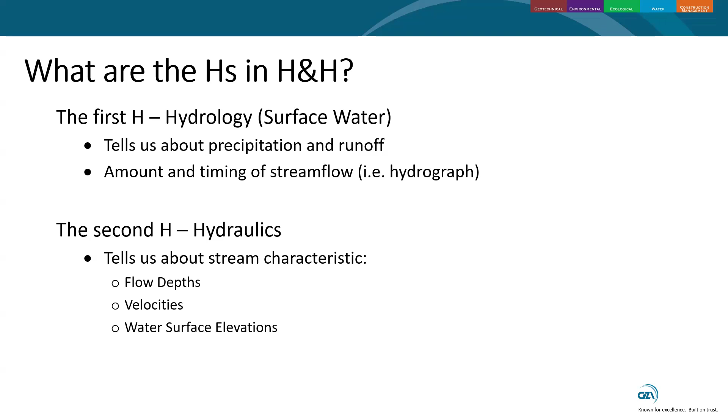Okay, basics. Let's talk about watersheds. So a watershed is basically the area of land that drains all its water into a common point, may that be a point in the river or a point in the lake. Watersheds are also called drainage basins or catchment areas. That's a phrase you're going to hear a lot used interchangeably.

These watersheds are basically defined by topography. So that's the high points, hills, ridges of the land itself. The old school way of finding a watershed is essentially by getting a contour map from USGS and hand marking all the high points around this one point. But nowadays, you can generally use computer software for that, which is very useful.

So an example of a watershed on the bottom right is the Charles River watershed there. And you can see, I guess you can't see the contours, but it has a distinct shape, and all that area in this yellow on the bottom right drains to the Charles River in Boston.

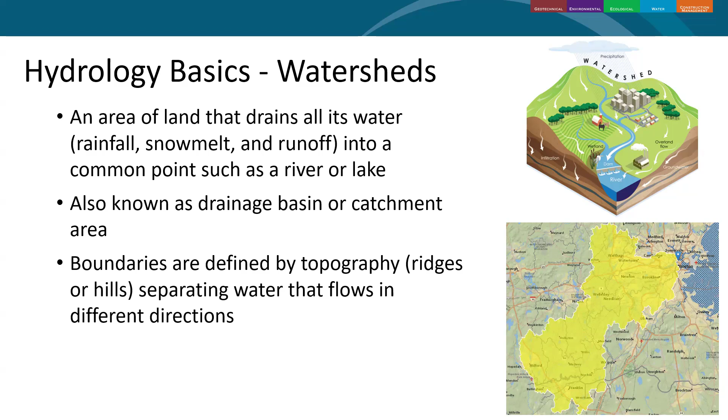All right, so precipitation or rainfall. Generally, precipitation is defined by two characteristics, which is the depth and the distribution. The depth, which is just the amount of rainfall falling, generally can be found from NOAA Atlas 14 for a design storm. That's our general go-to. Essentially, you go to this website, you click whatever point you want to look at depth there, and it provides a point precipitation frequency table, which is shown on the bottom right there.

And from that, you can get your 100-year, 200-year, 24-hour, whatever design flood depth you're looking for. So what's circled there is the 100-year, 24-hour storm. It's a very typically used kind of design flood. For this one point in Western Mass, it's 6.62 inches. So that's the depth.

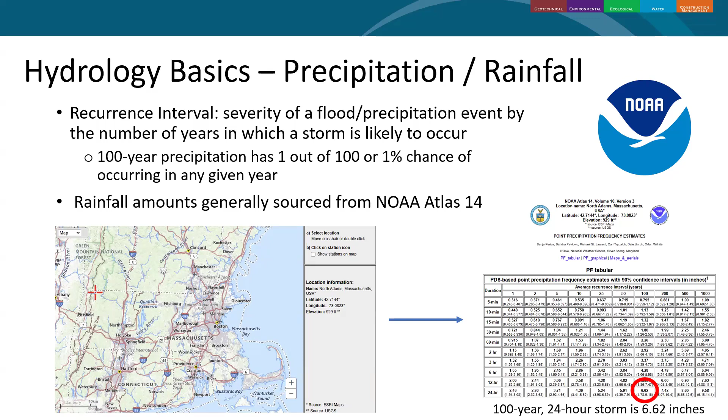The distribution of the flood or of the storm is also pretty important. In Massachusetts, for design floods, we tend to use SCS Type 3, which is a nested storm distribution, but there are other ones available out there, but we'll not get too much into that.

So runoff: essentially once precipitation hits the ground, it can either infiltrate or run along the ground. Runoff is the portion of precipitation that goes over land instead of infiltrating. Runoff is impacted by many things. In the watershed, it's impacted by soil characteristics as well as land use, but it can also be impacted by the precipitation characteristics itself, how intense it is, what the duration is, and the interplay between the soils and the intensity of the rain. But in general, we tend to use soil characteristics and land use to characterize how much runoff versus infiltration there is.

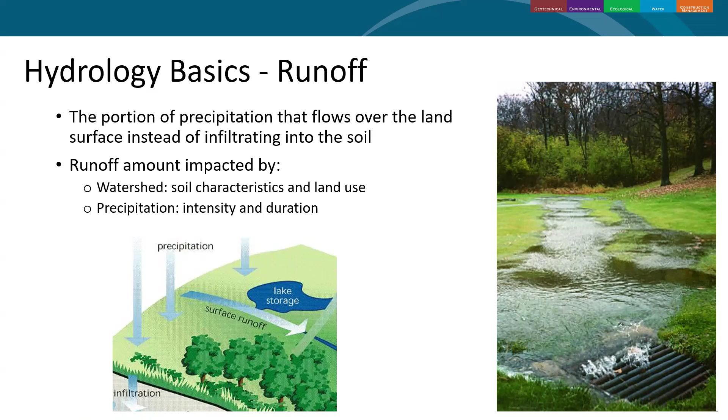So you get a giant flow record, this one's from 1931 to 2025, long flow records. You get the peaks from that, and you can perform a statistical analysis on top of that and find what's the 1% chance of a storm occurring. That's the 100-year flood. And we'll talk a little more about it here.

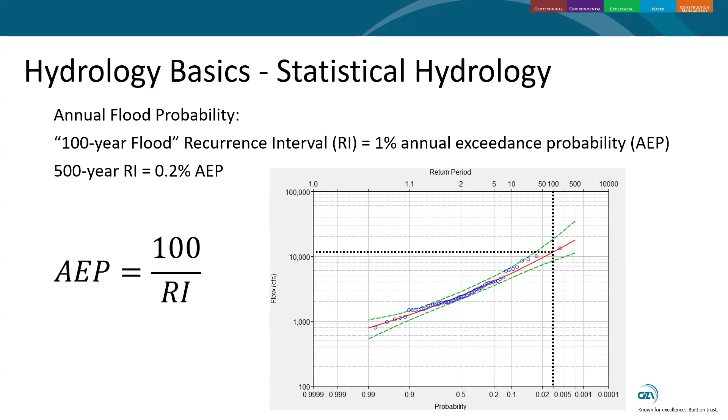So another thing you hear a lot about in hydrology is regression or regression equations to calculate flow. Essentially, it's another statistical method used to define the relationship between different hydrological variables. In general, for our analysis, we want to know what the peak flow rates are going to be based on watershed size and other variables.

So essentially, USGS, again, they record a lot of data at gauges all around a certain area, let's say Massachusetts, and they look at the 100-year flood at every flow gauge. And then they basically try to perform a regression analysis to see at what size and what, let's say, soil percent sand in the watershed produces this size of flood.

It's very complicated statistics, but all you need to know is generally you want to get a peak flow rate based on a watershed size and some other variable. And we'll talk a little more about how to find this data later on.

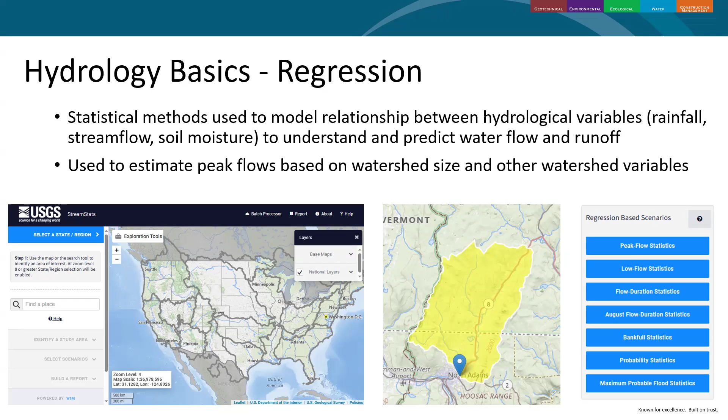Okay, so now changing a little from hydrology into hydraulics, we're going to talk open channel flow. Basically, open channel flow is just any flow that is exposed to the atmosphere and is at the pressure of the atmosphere. So this does not mean pipes or anything that's pressurized, that's not what we're talking about. It's mainly open channels, be that a natural river channel or even just a bucket, that's open channel.

And there are generally two big variabilities we talk about here. It is uniform and non-uniform flow, as well as steady and unsteady flow. I'll talk a little more about that in the coming slides.

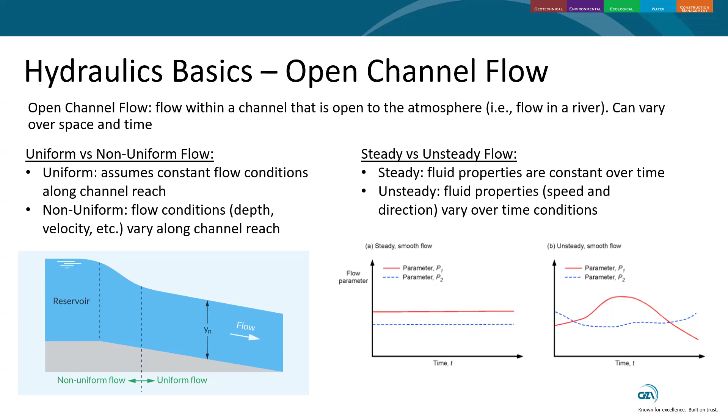For the most part, almost every river system is non-uniform at this point because there's so much damming, so many culverts, so many road crossings, everything along those lines. So it's very hard to make the uniform flow assumption nowadays.

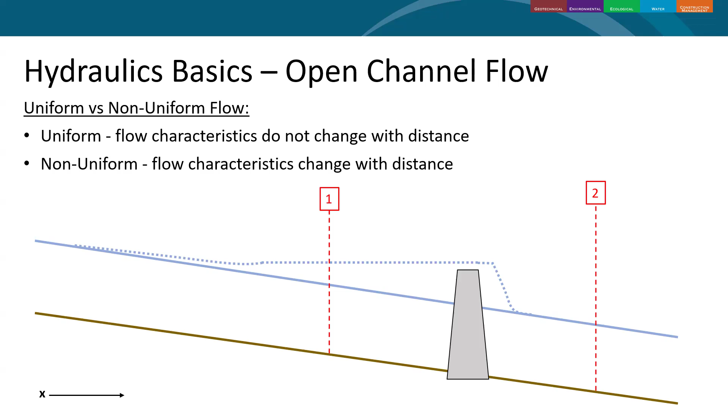So now let's go to steady and unsteady flow. So this is the same variability of flow characteristics, except in time instead of space. So steady flow assumes that flow characteristics do not change with time. There's just one value and it stays that way. Unsteady flow assumes flow characteristics change with time.

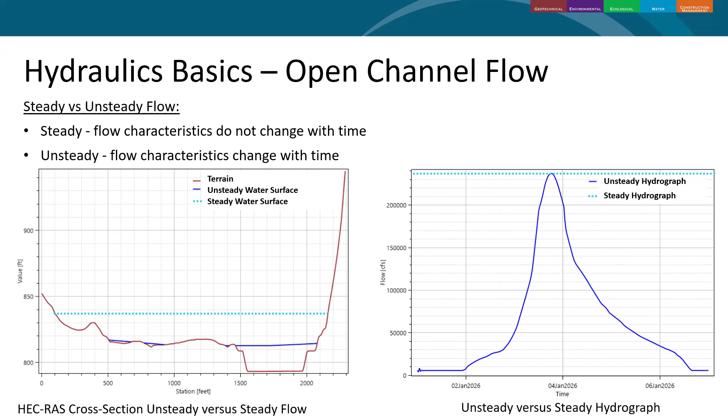And then with open channel hydraulics, you hear a lot about 1D and 2D modeling. I should preface all this by saying that in real life, all flows are essentially three-dimensional. There's up, down, left, right, upstream, downstream. 3D flows are described through some very complex differential equations called Navier-Stokes. Those are very hard to solve.

So some very smart people a long time ago simplified those equations into something we can use, down to 1D and 2D versions of these equations. And let's start with the 1D. So generally 1D assumes water's traveling only in one direction, which is upstream and downstream. In terms of left and right and up and down, it just takes an average of that.

So a 2D model generally assumes that flow is going upstream and downstream and left and right. In terms of up and down or in depth, it's depth averaged. So you still have a value there, but there's no difference between the bottom of the channel and the top of the channel in terms of velocity per se. And in general, 2D models are more suitable for very complex flows in an unconfined situation. So in a floodplain, for example, you get a lot more flow patterns, flow directions, and it's very good for looking at flow paths in that area.

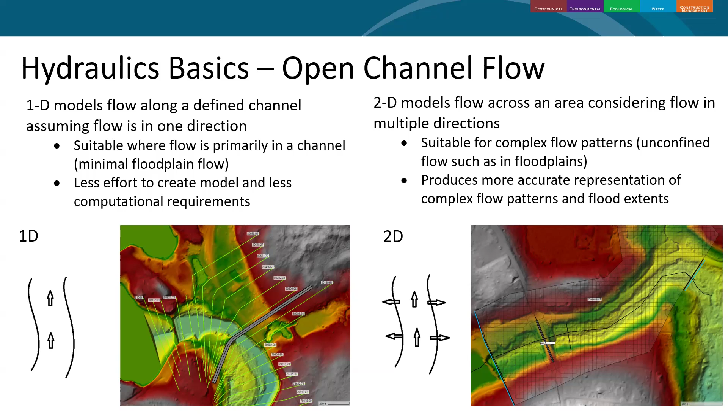So H&H modeling. Essentially, what are H&H models and what can they tell us? Why do we build them? What are they trying to do? When it comes to this, I like to put it in the sense of H&H models are there to answer a question without something explicitly happening. So you want to know how this dam removal is going to affect flooding, but you obviously don't have the funding to do the dam removal right now. So you build a model to try and answer this question without actually doing the physical thing itself. It's just a representation of potential proposed conditions, existing conditions, all that sort of thing.

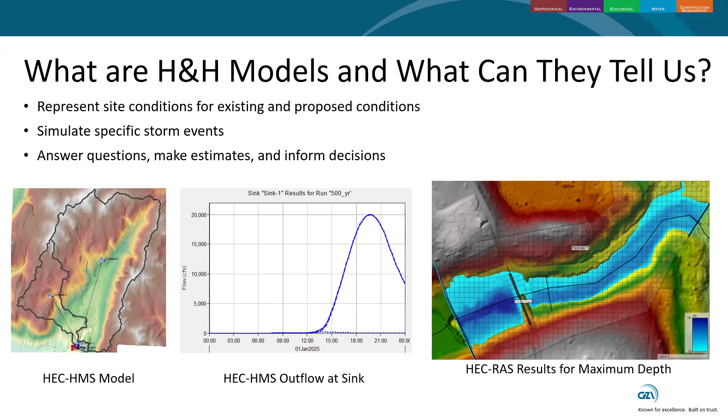And when you build a model, you essentially want to answer specific questions. A few examples of questions are erosion and scour. Is there going to be erosion and scour with this bridge pier? A model can help you figure that out. What is the velocity going to be? Is it going to be dangerous? How much flooding is there going to be? Is that flooding going to be hazardous? Those are questions that modeling can help you figure out. And explicitly for dam removal, aquatic habitat and fish passage is a very important question. And again, models can help you figure out how effective a certain removal geometry is for fish passage.

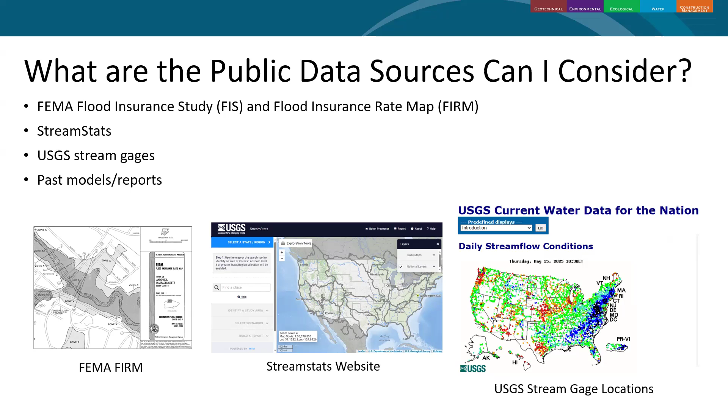So now we talked about modeling. I want to quickly go over some publicly available data sources you can use, because not every project, and not every stage, requires high detailed modeling. This is just very basic data that's available to the public and can be used to answer very easy early stage project questions. There's FEMA data, StreamStats data, USGS stream gauge data, as well as, depending on the project, past models and past reports. I'm going to go through each one of these and discuss what available data is around for these sources.

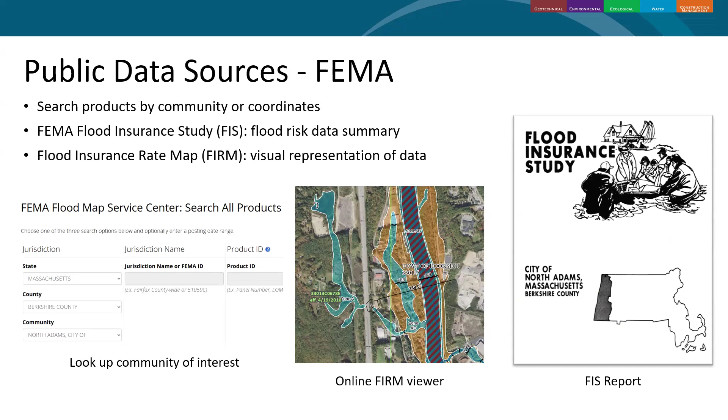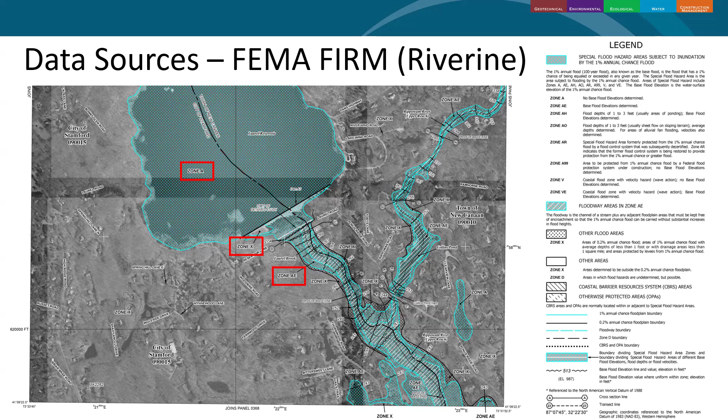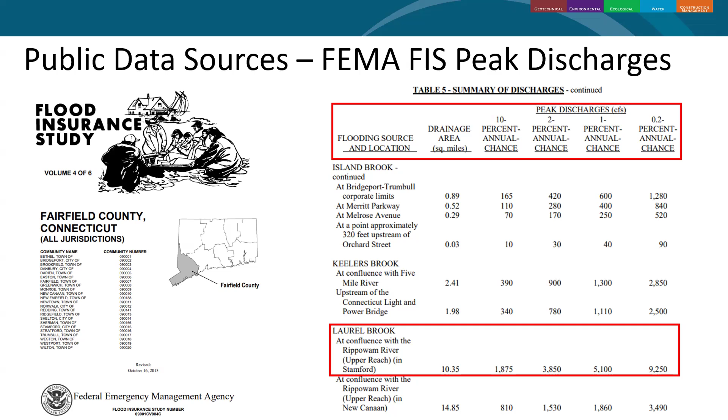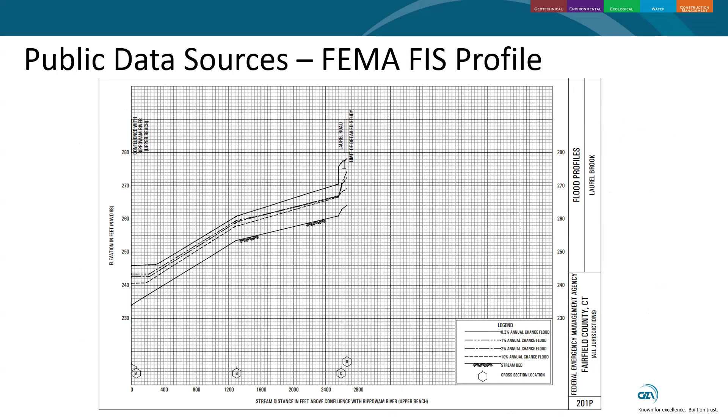And then on top of that, the FEMA FIS also has flood profiles. So they have their own models that they run, and then it provides elevation profiles. As you can see here, there's the, again, 0.2, 1%, 2%, 10% chance flood profiles here. And again, it might be a good starting point for a project to assess this data.

Another public data source is StreamStats. It's a web application maintained by USGS. It essentially relies on the regression equations that we discussed earlier to estimate stream flows at ungauged sites. So you basically go to the USGS site, you zoom in on a certain point, and these blue lines pop up. Those essentially represent stream channels.

You click on a blue line and it delineates the watershed for you and then provides peak flow values, base flows, whatever you might want, or I guess whatever data is available at the site. Again, it's a very useful preliminary tool, publicly available, very user-friendly, but it is not a rainfall runoff model. It only provides peak steady inflows or flows to the site.

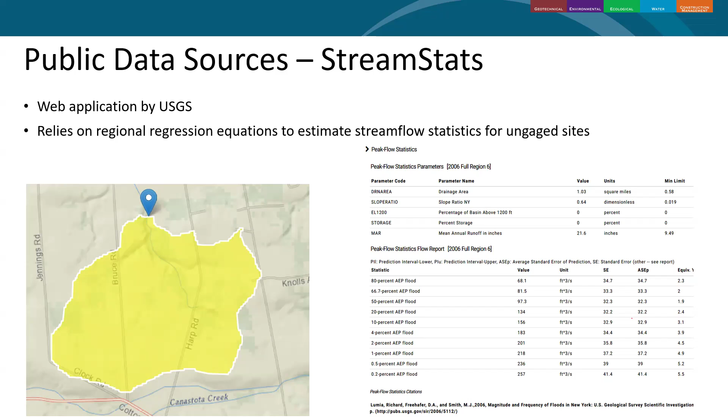And finally, there are stream gauges that are publicly available. As I mentioned, USGS maintains a bunch of stream gauges throughout the United States. When you click on one of these, you can see what data is available. Generally, it has discharges as well as gauge heights available, be that every 15 minutes continuous data, daily data, as well as peak stream flows from whatever year it started recording to the present or whenever it stopped recording.

It's a very useful interface. We're going to talk about the statistics of analyzing this later. Just if you use this data, make sure you're aware of its limitations and how to analyze this data for, I guess, statistical hydrological purposes.

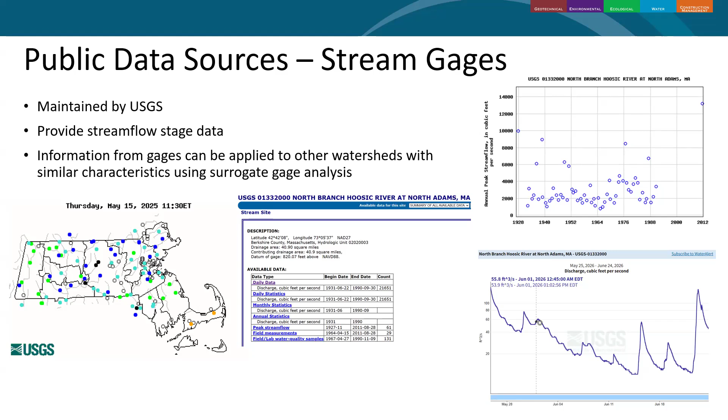All right, so now that we've gone over a few public data sources, let's look into more, I guess, software and models we can apply for both hydrology and hydraulics. So hydrologic models, there are many different types and there are many different methods. We've discussed maybe 3 different methods so far. There's regression method, there's gauge analysis, and then there's rainfall runoff modeling.

So regression equations, again, available through StreamStats. Gauge analysis is site dependent, depending on whether USGS has a gauge nearby, but you can analyze that data with USGS PeakFQ or HEC-SSP. And then rainfall runoff modeling, again, is converting precipitation depth and distribution into a hydrograph stream flow. There are many different types of models for that. The most commonly used in rivers anyway is HEC-HMS, which is a publicly available hydrologic model from the Army Corps of Engineers, but there's also HydroCAD, which is very frequently used, especially in stormwater contexts, and TR-55.

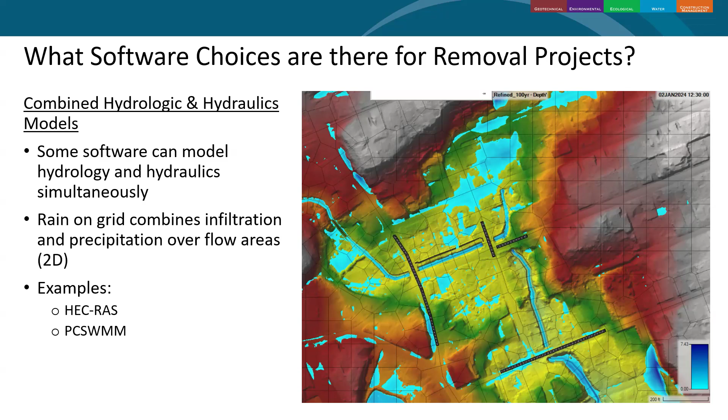And we're not going to talk too much about this, but there are specialty models, particularly scour models and sediment transport models. So essentially, what these models do is they have an extra layer of calculations on top of a hydraulic model or an H&H model to either estimate how much scour there's going to be, or how much movement of sediment there's going to be in a channel.

But I'd be very wary of jumping to these types of models, essentially because they tend to be, again, very input intensive as well as computationally intensive. So know that these models are available, but I wouldn't jump to them as a go-to for any type of dam removal unless you need to for a very specific type of project.

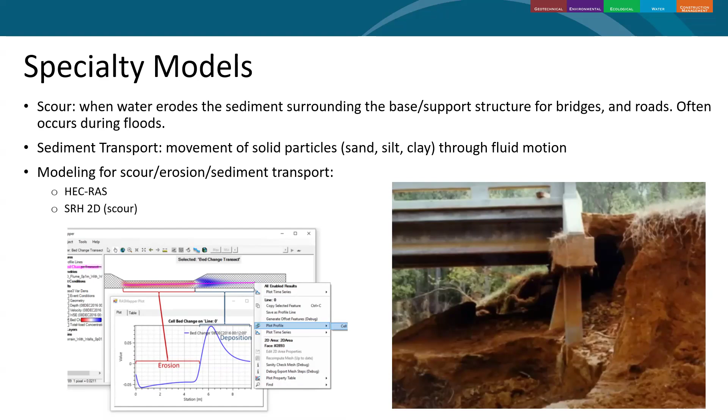Okay, so I gave you a lot of options for publicly available data, models, or H&H models. How do you choose? And again, I think it comes back to what questions you're asking and your desired output. The level of detail you might want, as well as your project goals, which relates to the questions. And then a final thought is budget and funding.

So for one, if you just want to know how much flow is coming into a site, you just need to know peak flow rate, then all you need is a hydrologic model. You don't need to think about a hydraulic model. But if you want to know characteristics of the flow at the site, such as depth and velocity, then you might want to opt for a hydraulic model as well as a hydrologic model.

There's the options of steady and unsteady. In this situation, an unsteady model would probably be needed if you're trying to assess something like flood retention and how much a flood is going to dissipate either with a dam removal or adding a dam or with wetlands in the watershed or in the reach. That is when an unsteady model would be useful, because a steady model doesn't account for those changes in flows over time with this being flooded or that being flooded or the dam being removed.

So that's pretty important. And then I think I mentioned this before, but when it comes to uniform and non-uniform models, pretty much every hydraulic model you're going to have now is non-uniform. The only uniform type of model I can think of is Manning's equation. It doesn't really account for changes upstream and downstream. It's just within the cross-section itself.

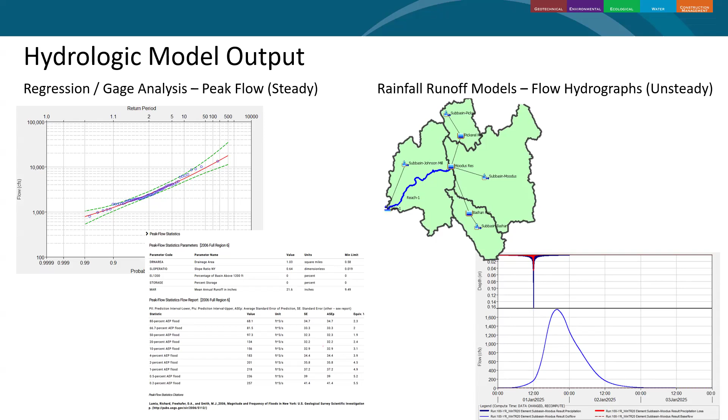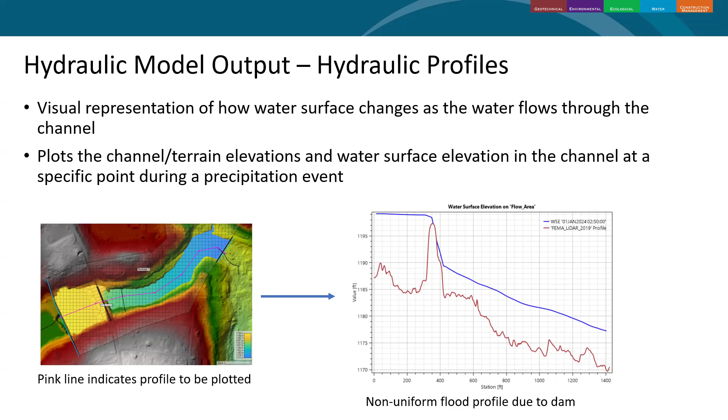And as you can see, at station maybe 380, there's a dam, it's causing backwater, and then downstream of the dam, you can see the hydraulic profile is a little more uniform, but that's just an example of a hydraulic profile output. You're also going to get inundation areas and depths. That is pretty useful information. So it's a visual representation of water depths at various points in the river system and your model. You can find maximum, minimum, and a range of depths within the flood.

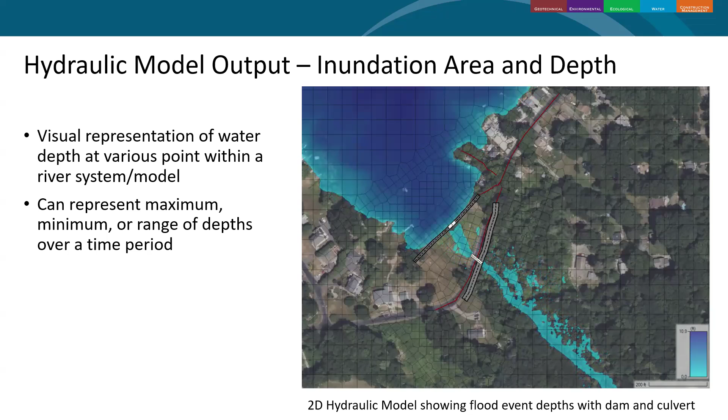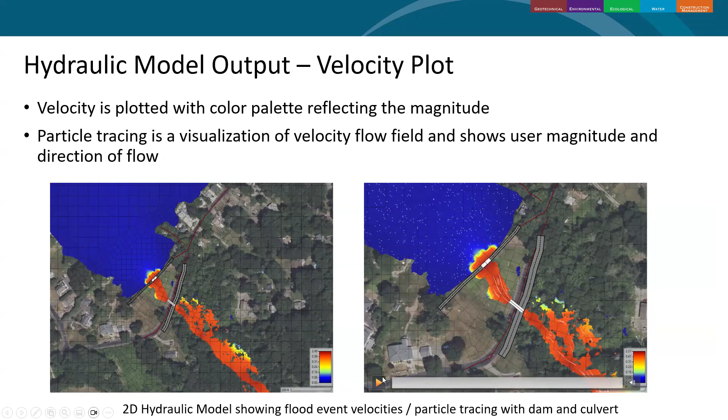And one last thing we want to discuss when it comes to modeling output is assessing how reasonable or how accurate your model output is. And if you really want to dig down and dive in to get your model very accurate, you might want to consider doing some calibration and validation.

So calibrating a model is essentially adjusting model input parameters to produce results that match observed data. Validation is another step on top of that where you're running your calibrated parameters to check against a different data set of observed data. So you would need a certain amount of available data for this to be possible. For one, you need observed precipitation, then you need observed stream flow.

And that's for calibrating a hydrologic model. If you want to calibrate a hydraulic model, then you need observed high water marks from a flood that actually happened, or just from base flows. But I would always recommend, if you're modeling for a flood, getting high water marks from a flood. If you're modeling for base flows, get observed base flows.

One thing I do want to say is that this is not possible in many cases. Like I said, you need that available data there to be able to do this. So it is very useful and very good, but it's a lot of effort and it may not be possible.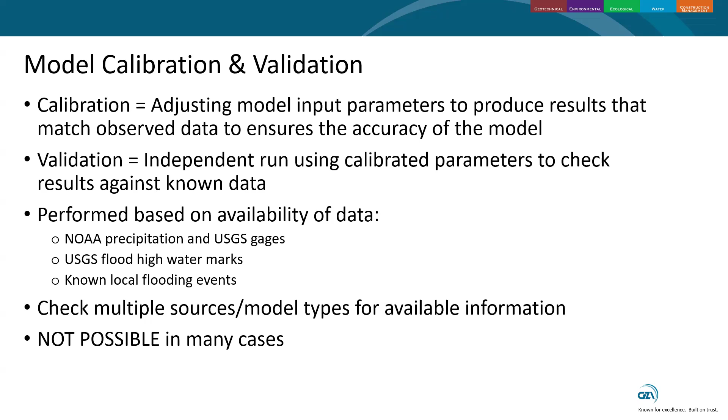For a calibrated hydraulic model, this is an example from HEC-RAS, and we had to get high water marks from USGS. I believe this is actually from Tropical Storm Irene. That is represented by the little red blips in this longitudinal profile here. That is the observed high water marks for this flood in Western Mass.

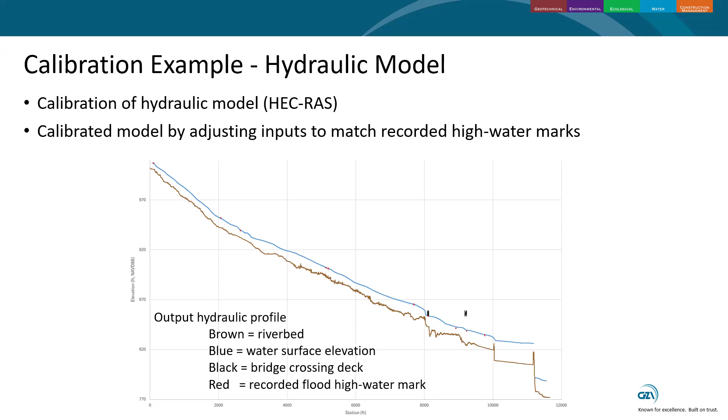Then we modeled this same Tropical Storm Irene in our HEC-RAS model, and this is the output profile. And you can see with a little bit of calibration that our water surface elevation hits these high water marks pretty accurately. So we're pretty satisfied with how this model was calibrated.

So coming back to the question of how do I choose a model, we have a few examples, and I'm going to go into a further example later. But let's say you're doing a culvert replacement and you want to reduce overtopping because the culvert is undersized. The question here is what size culvert is going to pass the 50-year flood without overtopping this roadway, right?

So when we want to answer this question, we need a hydrologic model to estimate the 50-year peak flow. You can do StreamStats, you can do HEC-HMS, you can do a gauge analysis. All those are appropriate methods for answering this question. And then to get the water surface elevations through the culvert or over the roadway, you have to develop a hydraulic model. You can use a culvert-specific hydraulic model like CulvertMaster or HY-8, or you can develop a 1D HEC-RAS model.

Our example number 2 is we want to remove a dam and we are very focused on fish passage. So our question is, what channel floodplain geometry will have the appropriate depths and velocities to allow for fish passage? In this case, for the hydrologic modeling, we need some sort of base flows because fish generally pass through during base flows rather than floods. So we're going to perform some sort of gauge analysis to get that. Or you can do StreamStats and use regression equations, but a gauge analysis is available. So that's what we did.

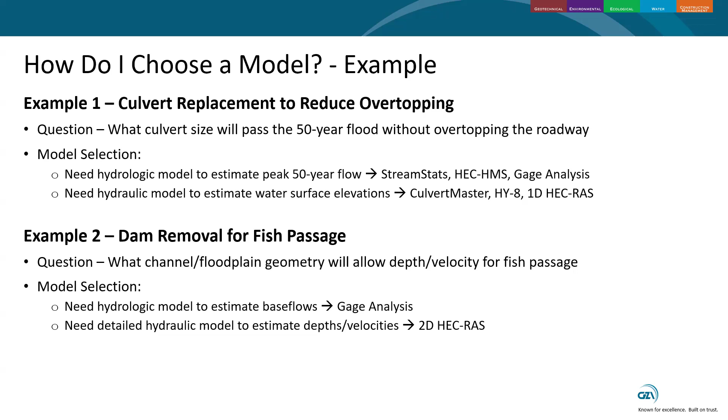So now we have a basic grasp and a few examples. We're going to add another layer of complexity on top of how to choose a model, what's the best type of model to use. And there are other things that are going to influence your model choice. So model choice is influenced by project stage, your permitting or regulatory agency, as well as the funding available.

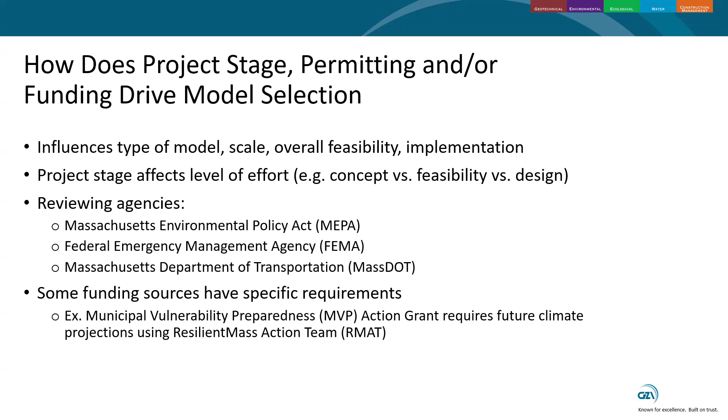So for one, the type of model we're going to use is going to vary depending on if you're doing a concept level or feasibility level study versus a final design study. You might want something a little more nitty-gritty that provides more detail for a final design study, for example. The type of model you use might be influenced by your review agencies, be that MEPA, FEMA, or MassDOT. We'll discuss that a little more later. And then the funding source itself; certain funding sources might have certain requirements.

So just to get a sense of low effort, low cost versus high effort, high cost for hydrologic modeling and hydraulic modeling. For hydrologic modeling, let's say you're early on in a project, it's a low cost feasibility type study, you might want to just use FEMA flows and StreamStats. That will get the job done. That's all you need. And then you might want to pair that with a very simple 1D steady model, maybe even the FEMA model that is publicly available.

But let's say you're further along in the project and you have a little more budget now to do some more detailed modeling and you have more questions to answer. You might want to pivot to a HEC-HMS model to see if there's going to be any changes in flood retention with the dam being removed. And then you might want to use a 2D model to assess fish passage or the velocities near a bridge upstream.

Along those lines, this is just a decent representation of what's a high effort and what's a low effort model in this sense. And then one thing I do want to note here is that any calibration of either H&H model is going to require more effort and more time on top of all this.

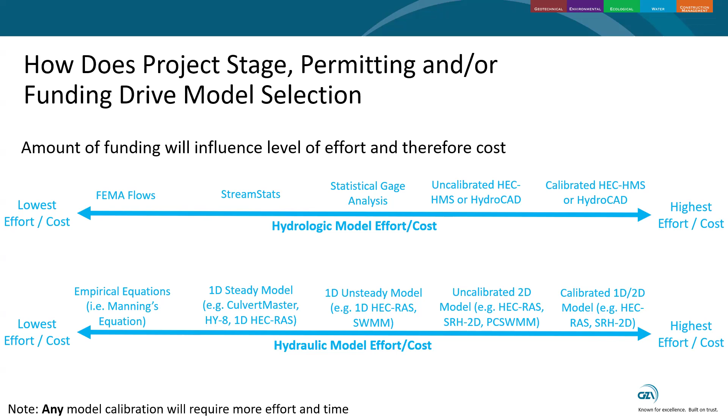So let's talk a little about how your review agency might affect what models you use. For example, certain ecological projects, usually dam removals, may qualify for a MEPA exemption. If that were to occur, then you could bypass the MEPA review process and you could have a little more flexibility with what type of modeling you want. But if you have to go through the MEPA review process, then that requires you to use the Resilient Mass Action Team, or RMAT, guidance.

Essentially, it's a website you go to, you type in your project characteristics, what it is, the funding, the potential effects, and it'll basically spit out a bunch of tiers and considerations you might have to consider. That may include future precipitation, how you model, and it basically provides a bunch of projections as well as a bunch of methods it wants you to fulfill to get through this MEPA process.

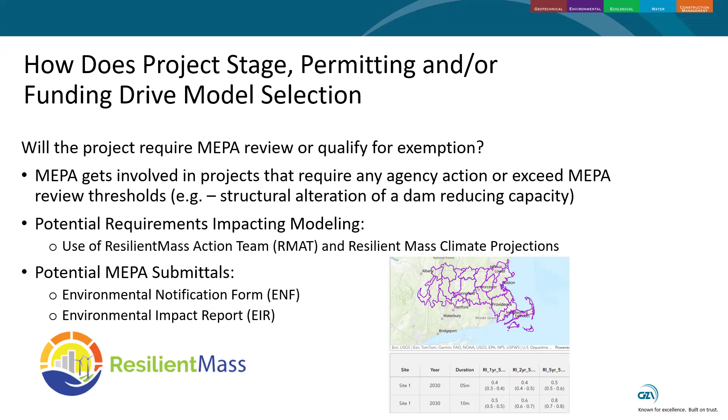Another really big sticking point sometimes is FEMA. We discussed looking at a FEMA FIRM before, and I quickly discussed being in a floodway. So if your project is in a floodway, then you have to at least go through the FEMA process and look at whether your project is a no-rise or causes any rise in the stream. FEMA has a very specific set of modeling methods and reports that it wants you to provide for this no-rise analysis. If no-rise is shown, then you can send that to local authorities and that could be set.

But if a rise is shown, then you might have to perform a LOMR or a CLOMR to show that this flooding is not going to affect any nearby properties or endanger anybody's life. But like I said, when this is happening, you have to essentially consider the type of modeling that FEMA prefers to look at, which is generally a 1D hydraulic model using FEMA flows.

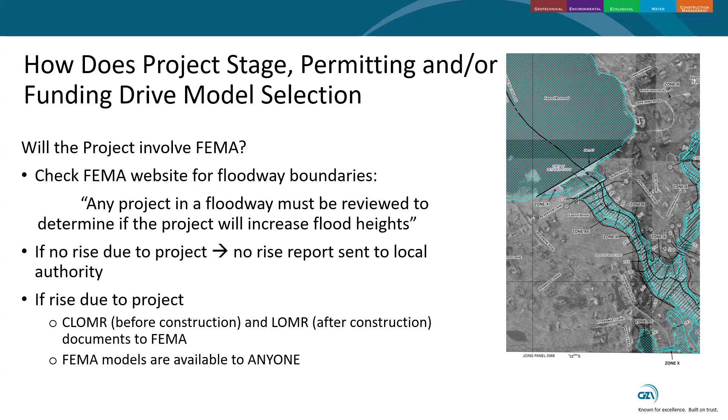So with all that complexity, I think we're going to try and end this with an example project. So this is a real project that GZA performed for a dam removal in Monson, Mass. It is a former industrial dam that has no use anymore. The aim is to remove the dam, reconnect the floodways, and then limit sediment transport from the impoundment downstream.

In terms of constraints here, we had some real worries about some retention walls on the upstream impoundment and how lowering the impoundment and then potential head cutting upstream will affect those walls. This was in a FEMA floodway, so we had to perform a FEMA no-rise. And then there are a lot of pressures and limitations in terms of sediment movement downstream. That was a big concern, as well as whether this is appropriate for fish passage.

So our H&H questions were pretty much: will removal increase flooding downstream? Big concern. Does the removal geometry re-impound water during a flood? So if the removal is performed, we don't want the impoundment to basically fill back up with water during a flood and become a hazard again. We have to make sure that doesn't happen with our removal geometry.

Another H&H question is, will the removal affect nearby infrastructure? And then does the removal allow for fish passage? Those are our 4 big H&H questions. And I think these are pretty common H&H questions when it comes to dam removals in general.

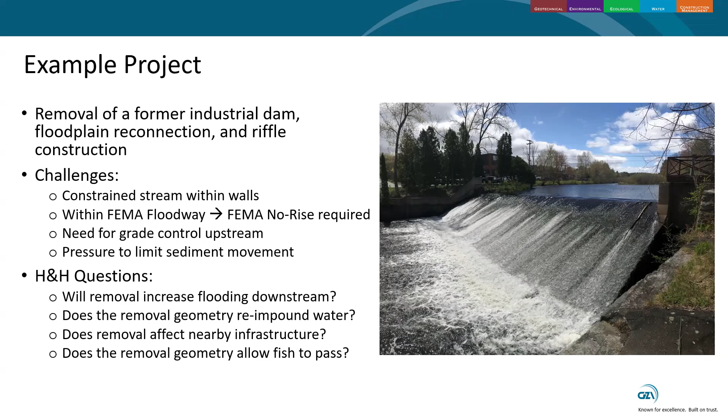So when it came to the project being removed, we did use publicly available data to start with. We looked at FEMA, we looked at StreamStats, we looked at publicly available LiDAR. But because of a lot of permitting and a lot of requirements on that front, we also had to perform our own modeling as well as collect a bunch of data in the field. Site-specific data we collected included topographic and bathymetric surveys, sediment sampling, probe depths, and then a bunch of wetland waterway

habitat surveying. But in the end, in terms of H&H, we performed a gauge analysis for this. We made a HEC-HMS model and calibrated it a little bit to the gauge analysis. We actually performed a 1D HEC-RAS model for the FEMA no-rise. And then when we got further down into the design phase, we found that the 1D model essentially did not have the spatial resolution we wanted to look at fish passage, to look at potential velocity changes in the impoundment. So we developed a 2D HEC-RAS model to answer those questions.

And when it came to these H&H questions, will removal increase flooding downstream? Our models showed no, it won't. And that was shown in both the 1D and 2D model, initially the 1D model. Does the removal geometry re-impound water during flooding? It showed that it didn't. So during the 100-year and the 500-year flood, which are significant from a permitting perspective, we showed that the impoundment did not refill with water and become a hazard again.

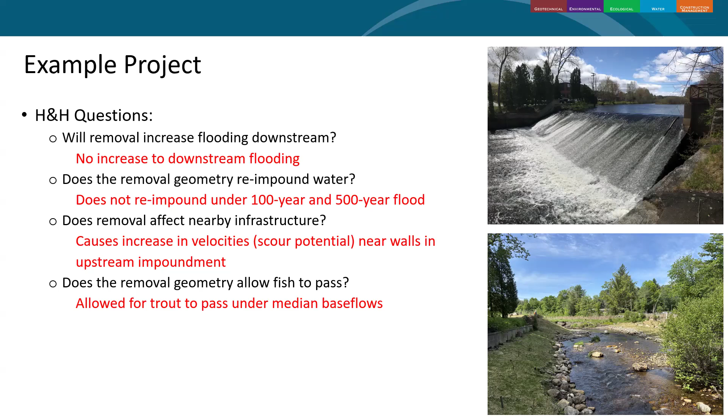And then finally, does our removal geometry allow for fish passage? We had to look at some gauge flow for this, model some very small base flows in the channel, and look at the velocities and the depths. And we found that our species of interest, which are trout, could pass this under most base flow conditions, including the median base flows during upstream migration season. So that kind of summarizes a lot of what we want to do with the example project. And I'm going to end with some key takeaways.

So for one, H&H means hydrology and hydraulics. Hydrology specifically refers to flow timing and magnitude. Hydraulics refers to flow characteristics once it's in the river, so depth, velocities, water surface elevations. Some common public data sources include FEMA data, be that the FIS or the FIRM, USGS stream data, as well as USGS StreamStats. Typical software for hydrologic modeling: HEC-HMS is, I would say, the most common hydrologic model, but HydroCAD is also very common.

And then for hydraulic modeling, HEC-RAS, I would say in the United States anyway, is the most frequently used hydraulic model. But you might want to put a little thought into whether you want to use a 1D or a 2D, depending on your questions again. And then the level of effort of your model and of the project in general is dependent on many things. That includes the project stage, the complexity of the site, regulations and regulatory agencies, the available data, as well as the available funding and budget.

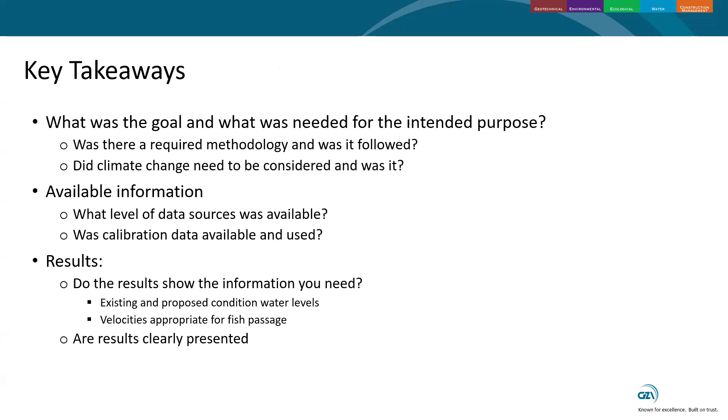Another sense is that they don't have the spatial resolution you would want for certain design parameters, for example. So again, in our example project here, we used the 1D requested FEMA model to perform this no rise. But when we came to our final design for fish passage, for example, the cross sections in the FEMA model were way too far apart to properly assess that. So we developed our own 2D HEC-RAS model to look at very nitty-gritty velocities and depths in that channel.

So I would say FEMA is very important because it is a regulatory agency. You definitely have to address it. But once you do, they generally don't have the spatial resolution you might want for a final design. So I'd always recommend, not always, sorry, but in general, I would say that we tend to make our own models on top of the modeling that we get from FEMA.

Great. Oh, here's another one from Daniel. In contrast to surface waters, can you recommend any sources for groundwater flow models for withdrawals through public and private wells to promote an understanding of sustainable yield for groundwater? Yeah, I'm gonna say I'm not an expert on groundwater. You can definitely email me after, and I can try and contact some folks I know in GZA who are a lot more expert at groundwater. I'd be happy to do that.